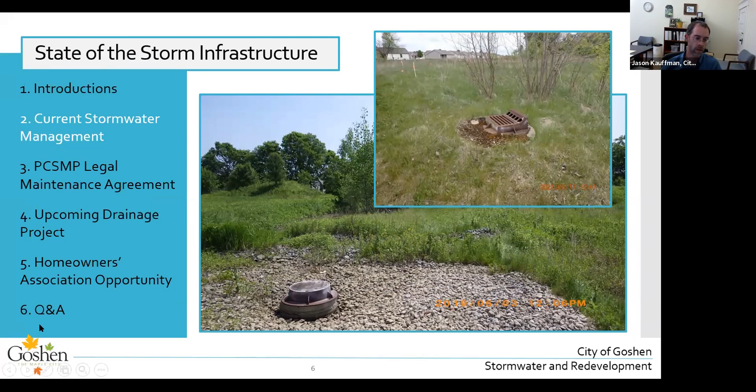So first here, we wanted to talk about the state of the stormwater infrastructure in the Crossing as it is right now. What you can see here in the previous slide were just some pictures of unfinished components of the stormwater infrastructure, because the initial project was developed in phase one, and other phases have not yet been completed. Going to the next slide, it shows an overall aerial of the portion of the Crossing that is already developed.

What we wanted to show here with this map is the infrastructure that's there, the different types of stormwater infrastructure. For the Crossing, there are stormwater basins - you can see those on the right-hand side, and then also at the top and at the entrance. There are some swales that drain stormwater from backyards to these basins, and then there are storm structures and storm pipes, and we'll get into those more as we talk.

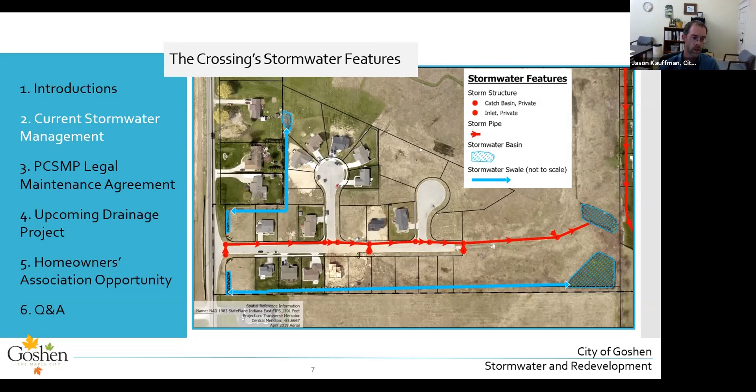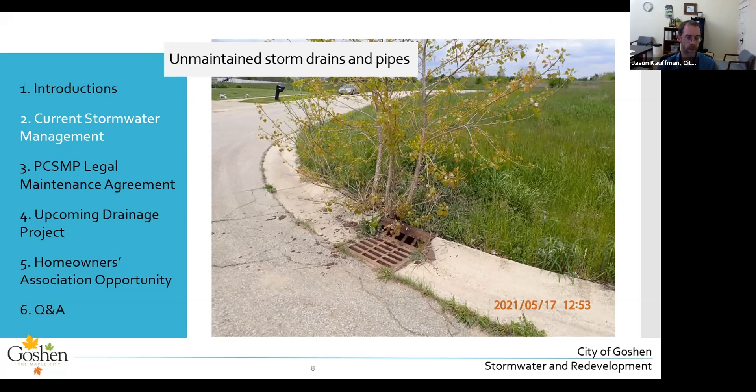So on the next slide, we are looking at unmaintained storm drains and pipes. As this development has existed, the city accepted the water lines and the sanitary sewer lines, but did not accept the storm sewer because it has not yet met our requirements, the city's requirements. And so these structures have not been maintained as much by the city. There are some issues with the infrastructure that's there, whether they have trees growing out of the back, or have sediment in the structures.

Again, here is a slide showing the infrastructure, and the infrastructure that's highlighted in red - the storm drains, the storm structures, and the pipes - are what would be accepted by the city once the requirements that the city has for drainage are met. The areas in blue, the swales and the basins, are the responsibility of the property owners.

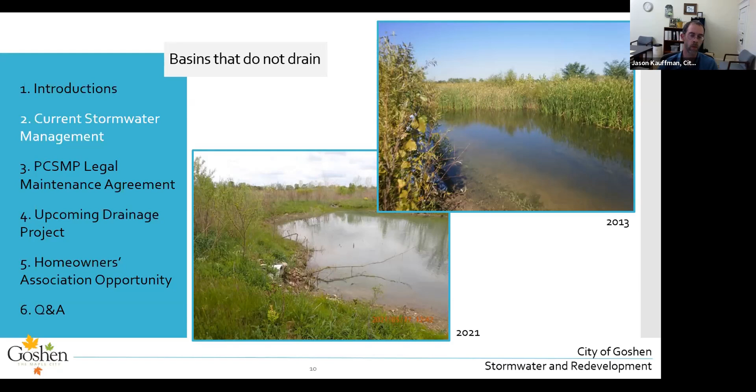Some of the issues that have existed with the stormwater infrastructure at the crossing, the retention basins that were constructed at the very beginning, are holding water where they should not be. You can see here two different pictures from two different years, 2013 and 2021, and both times these basins have been holding water. That is a concern, because these basins are designed to hold a certain amount of runoff and then drain dry within 36 hours.

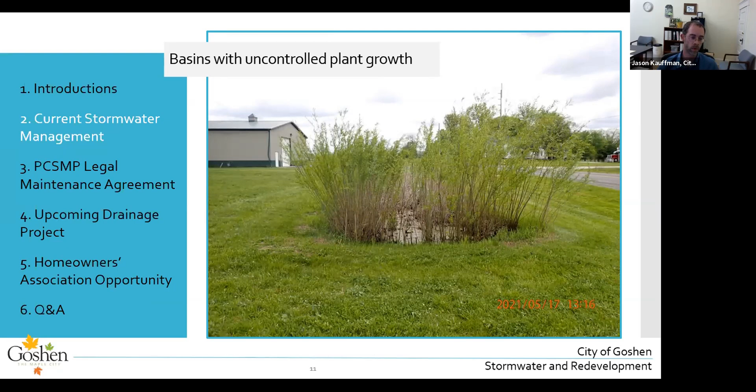That has not happened, and it's something we are planning to address in the project we'll be talking about tonight. Also, these basins are not being maintained because woody vegetation is being allowed to grow in them, and because of the water, cattails and other plants are growing there, which makes it more difficult to maintain. Typically these basins are to have woody material removed and to be mowed, and that has not been the case. In this picture, you probably pass it every time you enter and exit your neighborhood — this is the basin right on the south side of the entrance.

So back to this map again, showing the different infrastructure and where it's at. The basins, as well as the swales, are the responsibility of the property owners, and the storm infrastructure, the structures and the pipes, will become the city's responsibility once they meet the requirements.

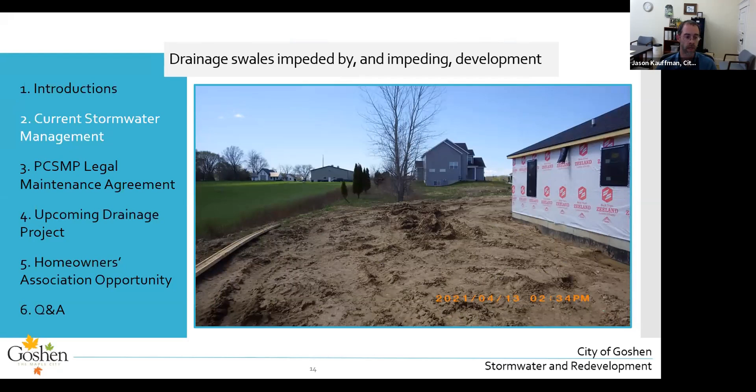Another issue we have is with the drainage swale on the south side of the development. There is a berm there as well, and that berm was not installed correctly. It was installed where the swale should have been, and this has caused some impediment to drainage. So in some cases, some of the homes have filled in the swale because of how the swale did not go directly east to west.

So, maintenance — whose responsibility is it? The crossing has, as well as many other neighborhoods and construction projects throughout the city, a post-construction stormwater management plan, or PCSMP. A post-construction stormwater management plan details how the property owner will maintain the stormwater measures that have been installed for post-construction control of stormwater runoff.

So how do we get to this point? Why are we here? Back in 1972, the Clean Water Act was passed to create and manage pollutants going into our waterways. From that point source pollution, which is what they were focusing on at that point, they cleaned up those issues and our waterways became cleaner, but they were not clean — they did not meet the requirements or standards that the Clean Water Act had set.

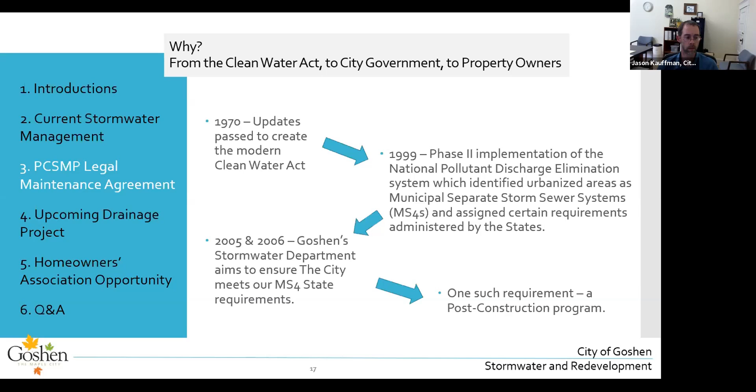So here are some selections from the post-construction city ordinance. Section 3 is...

Section 3 deals with maintaining any and all stormwater measures and practices identified in the construction plan that were intended to remain in place after construction activities have been completed. This points to the measures managing stormwater runoff from our homes, from our roadways, and also the quality of that runoff.

Stormwater runoff is water that comes from rain or snow melt that runs across hard surfaces like roofs, sidewalks, driveways, and roadways. As that stormwater runoff goes across those hard surfaces, it picks up pollutants. So the post-construction measures are about how those pollutants are controlled, removed from stormwater runoff, or prevented from being picked up by it.

Section 4 and section 5 are a little bit similar. Section 4 talks about the creation of an enforceable maintenance agreement, which describes who is responsible for maintaining these post-construction stormwater measures and how the maintenance will be funded. Section 5 goes a little further and adds the requirement for property owners to inspect those post-construction stormwater measures, which we'll get into here in a little bit.

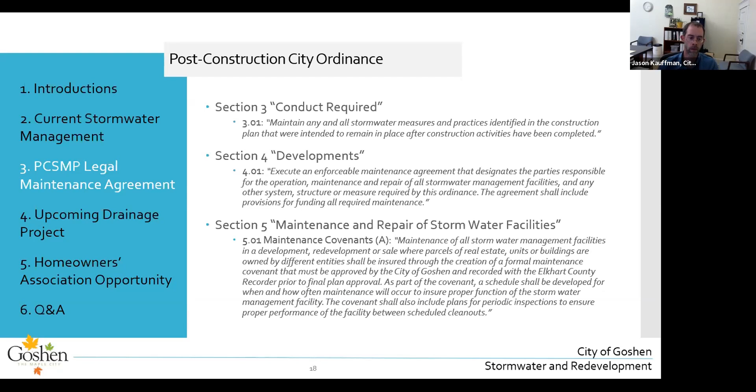As part of the post-construction stormwater management plan, there is a legal maintenance agreement which identifies who is going to maintain these post-construction measures and how that's going to happen. The essential requirements from that are maintenance, inspections, corrective actions, and notification upon the sale of a property.

In maintenance, if you had a chance to look at the post-construction plan, you would come across the maintenance agreement. There is a section called real estate owners' responsibilities, and in that portion of the agreement, it describes the different responsibilities that property owners have for maintenance.

For example, maintaining those measures that are located on or used for the benefit of the owner's real estate. So if you live on the south side of the neighborhood or subdivision, you may have a swale in your backyard, and it's your responsibility to maintain that portion of the swale. Or if you live where there's a retention basin, then it's your responsibility to maintain that. However, there are some provisions in this agreement that allow for everybody to be part of that maintenance.

Another example is maintenance of all erosion sediment control measures that are on your site. If you are doing activities that disturb the ground, you need to manage those bare areas and get them stabilized.

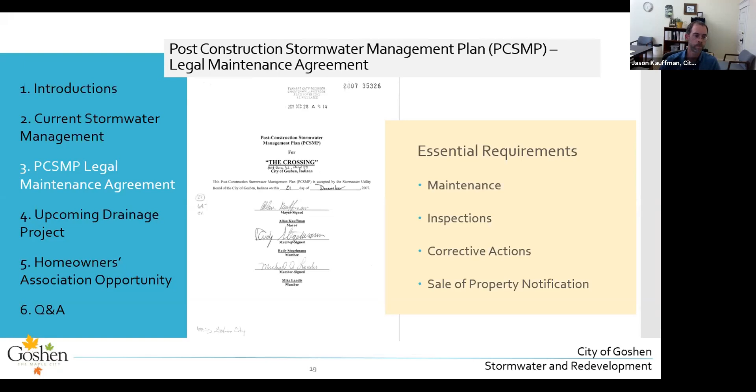So what features are maintained? Maintenance, inspection, and corrective actions apply to the different post-construction measures. Again, looking at the red and blue: the blue measures are the responsibility of the property owners, the swales and the retention basins.

The red areas, the storm structures and pipes, once they meet the requirements of the city and the city accepts them and takes over maintenance, the city will maintain those structures by cleaning them out, vacuuming them with our Vactor trucks, removing any sediment that has accumulated in the sumps of the catch basins, and cleaning out the pipes as necessary.

That responsibility goes up to the end of pipe where it discharges into the basin. At that point, the responsibility is maintenance of the riprap, the stone at the pipe, removing woody vegetation from the basins, making sure any sediment deposits are removed, and if it's not draining correctly, figuring out why and removing the accumulated sediment.

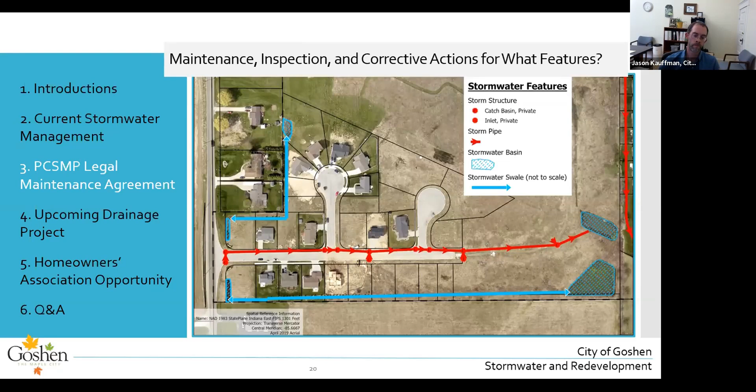So what does maintenance include? There are two different types of maintenance included in this post-construction agreement: structural control measures for the stormwater measures themselves, like basins and swales, and non-structural, which is what we call housekeeping.

Removing woody vegetation from basins or swales is important so they're maintainable and water can flow through to where it needs to go, whether it soaks in or continues on. Checking pipe outfalls where the pipe enters the basin for erosion and fixing that, sometimes trapping animals and removing them since burrows can create problems, and removing sediment and trash that might have accumulated. Those are the structural component items.

Non-structural housekeeping, what should be done on your own property, includes how you maintain your vehicles on site, cleaning up any oil that might have spilled if you change your own oil, and not dumping things down the storm drain—only rain should go down the storm drain. Disposing of oils and other fluids should be done in appropriate ways. When you mow, if grass clippings get on the street, having those swept up or blown off so they're not washed into storm drains causing clogging or nutrient pollution.

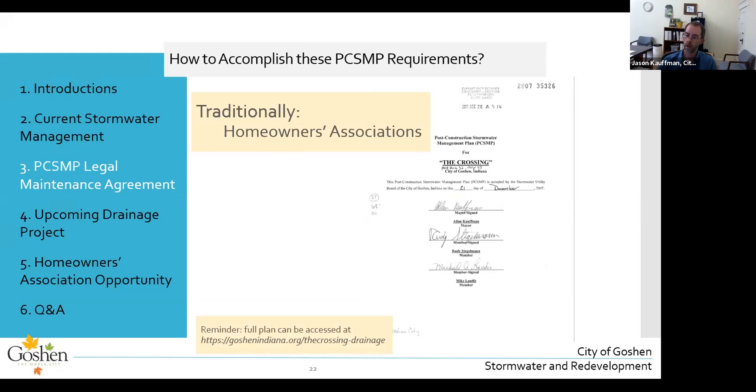That brings me to what happens if property owners fail to maintain these measures. The city of Goshen has the right to enter property to make sure post-construction stormwater measures are functioning correctly. This is like when we'd come out and do an inspection—we'd walk through the swales and basins to look at them, and check the outfalls to make sure they're functioning correctly. The city of Goshen can take action to correct post-construction stormwater measures if they're not functioning as designed and are creating problems, and we can assess the property owner or homeowners association for the cost of those repairs.

With the project we're going to be proposing tonight and describing to you, any work we'd be doing on private property will be done after right of entry agreements have been obtained for that necessary work.

Thanks, Jason. So we've covered how homeowners within a subdivision are all responsible for these stormwater measures. But we've also seen how the Crossing neighborhood's stormwater measures are in rough shape. Next we're going to hear about how the city is working with Abonmarche Consultants on a project to address these issues and do a master drainage plan for the whole region, giving you all a clean slate so you can take on these maintenance things once they're in a better place. So I'll turn it over to Brad first.

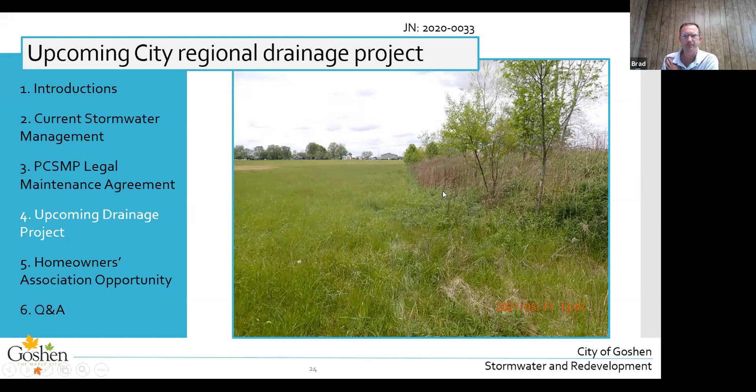A lot of feedback. Okay, while he figures that out, I'm happy to talk for just a few minutes. And you're welcome to share the screen, or you don't have to.

If you guys can see me, I'm Becky Hutsell, the redevelopment project manager for the city of Goshen. I've been involved with this overall project area for several years. I'm sure most of you living in this area probably haven't lived there the full time, or if you were, you weren't part of the planning process for this. The post-construction plan is a recorded document, so it would have been in that massive pile of closing papers when you purchased your home.

But I myself probably wouldn't have necessarily understood it. Our intention all along is to have the HOA established prior to people moving in, so that the rules and plans for management of these projects are planned for from the beginning.

I'm sure we've thrown a lot at all of you guys tonight. I'm sure you're all sitting there thinking, what are you doing? How are you going to come make us fix all this stuff?

We realized that as this subdivision was developed, the original developer ended up losing the property to the bank. We've had additional developers step in, so it hasn't been a seamless process. We also know there's a lot of drainage issues within this area. We know the soils don't allow for much to filter into the ground, so a lot of water has to be held and taken away through pipes. We also realize there's a lot of water coming into this neighborhood from the property to the south, and a lot of water flows through this property to the north.

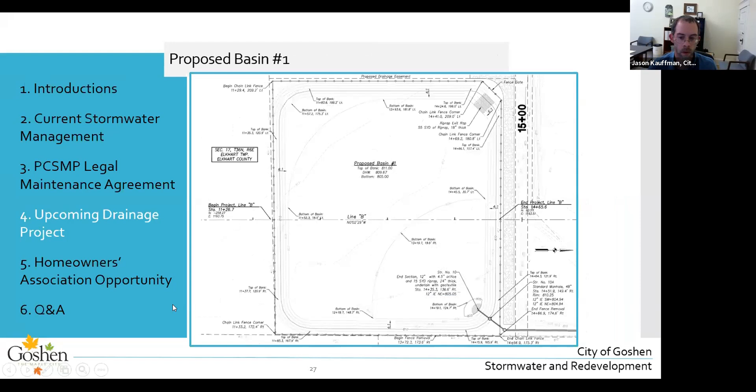All right, so this is a big close-up. Actually, if you want to zoom back out just a little bit more. There you go. So as you guys are looking at this, you'll see your neighborhood—you'll see Lighthouse Lane coming off of Green Road, which is County Road 19. The area to the south of you guys is currently a field. I think there's a small barn type structure on the property, but I believe the long-term intent would be to develop something there.

We have worked with the owner, which is MR Realty, and our intention is to capture all of the water that's coming from the south through swales and things of that nature into a substantial retention pond there. It's at the bottom left of the screen right now.

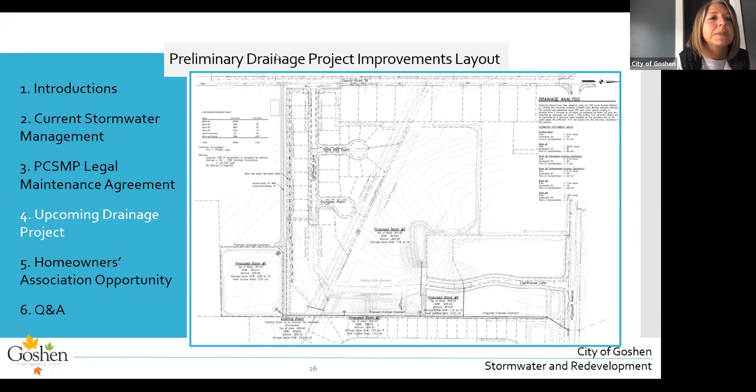As part of the project, we're looking at the southern property line for the crossing neighborhood, the homes built between Lighthouse Lane and the property line to the south. As Jason mentioned, there's a drainage easement there. The intention was always to have a swale to capture water and direct it away from your homes. Somewhere along the way, the idea came to create a berm to block the view from the property to the south.

What happened was the berm was placed more at the north edge of the easement, so the stormwater can't actually make it into a swale. We plan on working with the owners in that area to shift the berm south to the property line and recreate a swale.

So this is now looking north. You'll see at the bottom right corner the large pond, cleaning up some ponds, taking the water all the way north up to Green Road through a pond and discharging under the roadway. Then again at the southern boundary line for the crossing, we want to clean up that berm and clean up the swale.

I know there are several properties out there with sump pumps that run frequently. We're hoping to take away that need, which would be great.

Jason, what am I missing? Can you think of anything I'm missing, Jason? No, I think you covered all the concepts pretty well. Okay, so overall that's a lot of work.

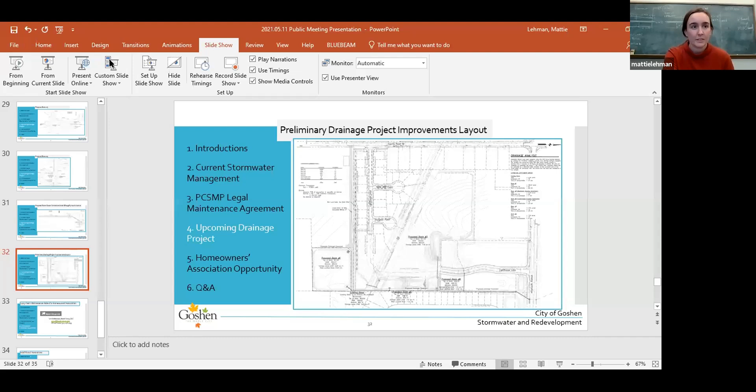Becky, do you mind talking a little bit about how you and Tom have worked together? Yes, so the Barat Group has purchased, I believe, 5 or 6 of the lots at the southern eastern edge of this development. They also own the remaining land within the subdivision that hasn't been parceled out yet. And so their intention is to fully build this out. As they've continued forward, we've continued to talk with the property developers out there about the long-term need for this HOA.

And the Barat Group, Tom DeMeester is the representative here tonight, has been working with us. Their group has worked with Yoder Ainlay to develop an HOA for the lots that they own. And then they are also inviting others to join into their HOA. As many of you know, HOA, there's an annual fee, but then those fees can then go towards the long-term maintenance of the stormwater features. I think Tom can introduce that concept and talk to you all a little bit about what their plan proposes. So Tom, take it away.

Thank you, Becky. Thank you for inviting me to attend a meeting. I am Tom DeMeester with the Barat Group out of Granger, Indiana. We currently own the majority of the undeveloped land, and on the south side of Lighthouse Lane, started at lot 24 where we built a house last year. We have 2 empty lots, and a house going up right now currently, and then we'll have another lot on that side of it.

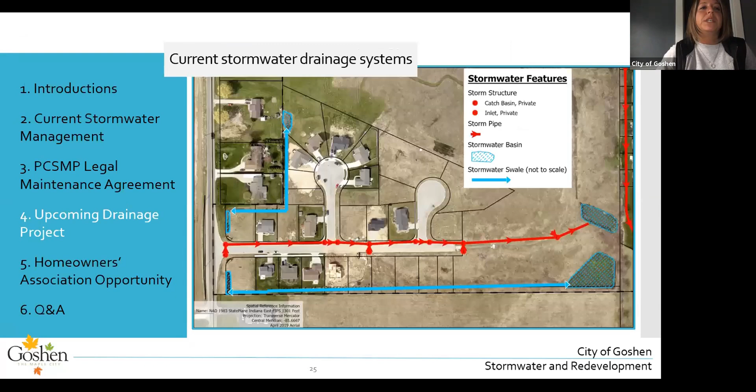As you'll see on those blue arrows at the south end of your lot, the goal of the swale in the backyard is to be just a depression where the water will flow to, and then either flow west to that area on the left side of your house, or flow up around the corner to the other pond.

The goal is that each of the yards has that depressed swale, that small grass area where the water can flow through to connect to one of those 2 ponded areas, so it can drain.

Part of the problem we've noticed is that as people build their houses, swales get removed. So all of a sudden the water that goes to that spot in your backyard can't go anywhere. That's part of the goal of the HOA - to ensure those blue areas are kept intact so they can drain to the ponds that are maintained and can drain away. That is part of what it's there for.